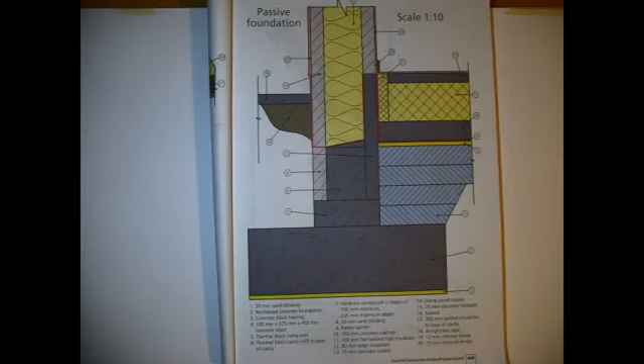In this video we're going to take a look at the passive foundation and how we set this up, and we're also going to look at what's in the workbook and some of the points that are not really making this workbook a passive foundation. So we've got a cold bridge running from inside to outside here, so obviously it's not going to be a passive foundation with that there.

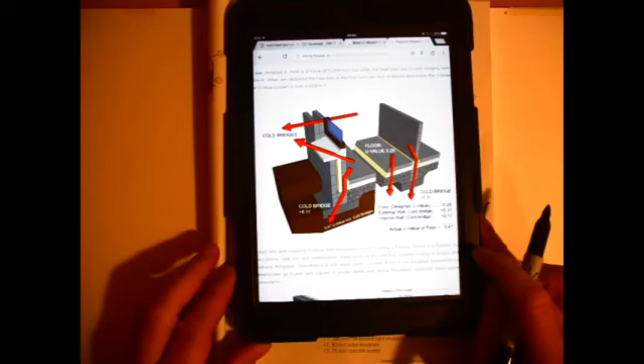So taking a look at a few details here online, we can see from the pictures here on the iPad, the first one showing cold bridges, but there's the EPS that's used here as the formwork, the expanded polystyrene. The concrete is poured into this, and it creates a kind of cloak around the concrete, preventing the cold bridges.

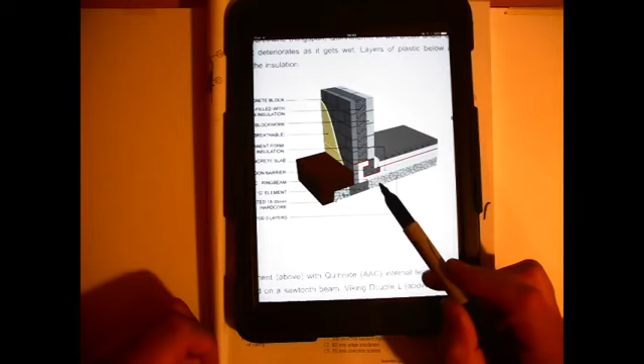So you can see some of that there, and some details are shown here of EPS being used. The one that we're focusing on is going to be a concrete block wall, which we see here, and you can see the cloak of the EPS at the very bottom. There's some hardcore fill, EPS layers, permanent form around there, which we looked at just before that.

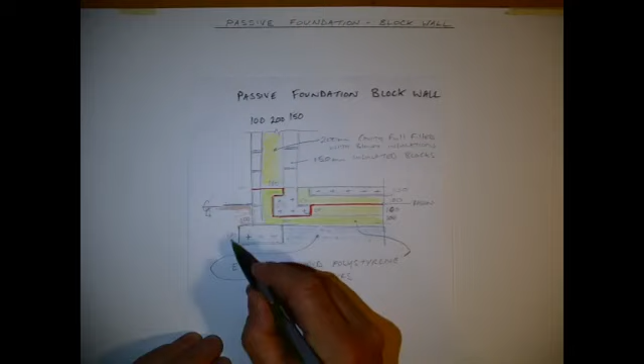I've done a quick sketch here to show this, and colours are going to be quite useful in this drawing. We can see the foundation, which is slightly off centre for the support of the external wall. That can be formed from the inside with the EPS, and the outside would be hardcore. You'll be looking at a depth somewhere between 100 and 300, so I'm going to pick 200.

What I'm showing here is the line of the 200 cavity fill is in line with the inside edge of that foundation, and we have a 150mm insulated block used here. Quinlite is the brand that we'll be looking at. Basically it's just a block with insulation in it, and the size is increased to increase its strength as well. I'd like to keep the ground line somewhere in line with the radon as well, and this is the EPS that we see at the bottom.

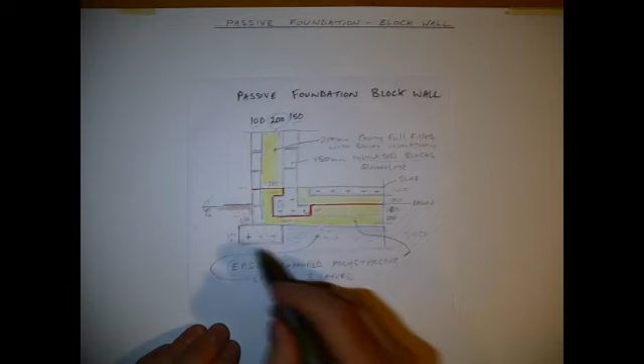So roughly there's 300 underneath this here. Obviously the subsoil will have an impact on the design of the foundation as well, and the way it's done. There may be a need for compacted filling underneath, depending on the soil type. So anyway, to get started, we have to start here at the bottom.

I'm going to start with drawing the foundation part for the external wall, and the sizes I'm using are 400 by 200, and the scale is 1:10. Different to some of our other drawings, I'm going to use a block size of 225, and you can allow a double line for where the mortar joint will be. That's what I've used there, so 225 up to where the ground line is.

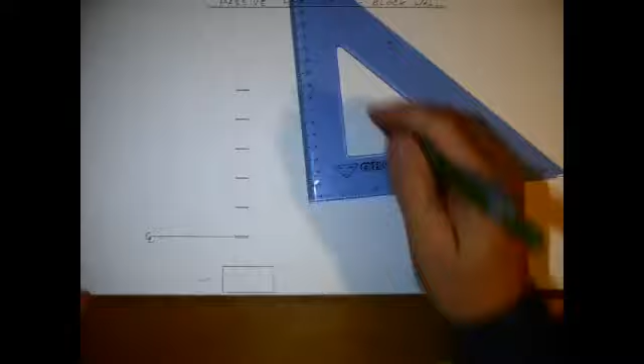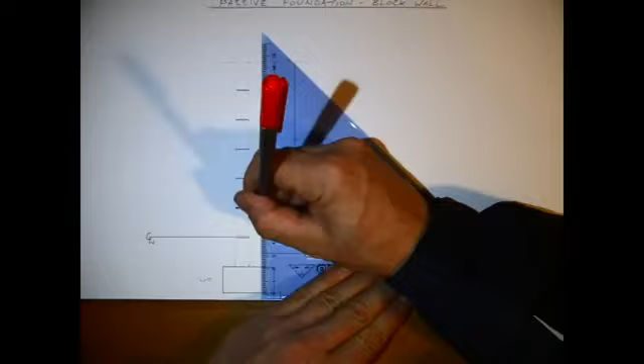Then I need to come over my 200 for my cavity fill and the lining up of the EPS. So I've created this block on the inside, and basically it's taken 100 from the inside of the external block, and they're lining up, matching sizes. So that's all that's done with that. You can look back to the initial sketch for alignment details, and I've got a slab drawn here at 100 as well.

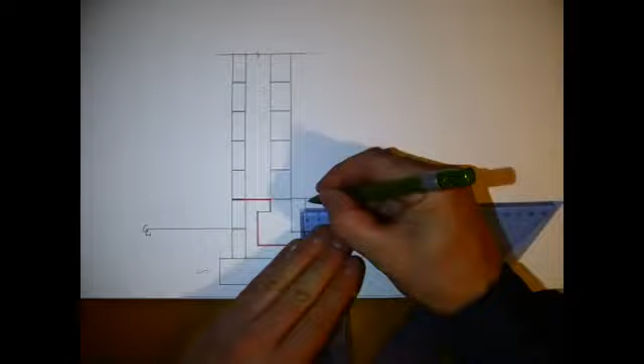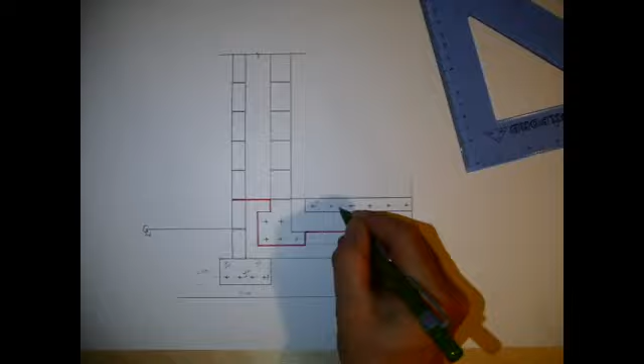The lines are important too for the former, which is used to create the ring beam, and these are reinforcing bars that have been placed in. Spacing I don't think is terribly important, so long as you don't go too close to the edge. Keep it back 50 and something that looks quite even, because we wouldn't be familiar with the exact building regulations and sizes of reinforcing bar, but by showing it's there, you're showing you understand that it is a requirement.

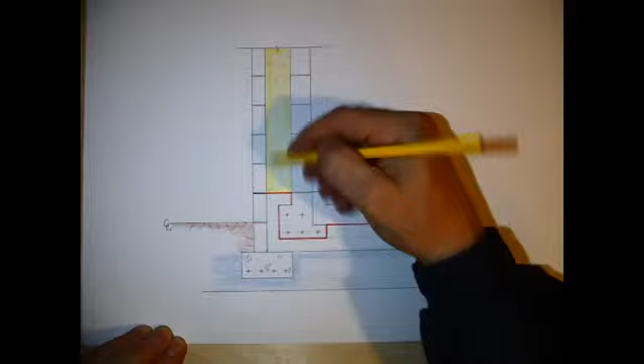Other details then, slightly different for the cavity fill. This time I'm not using the standard detail, because it's a blown insulation, and the blue is showing the EPS at the very bottom. At one point it's going to come up against a graded fill, so that has to be shown as well, and I use a slightly green colour to show the former of the insulation, which we looked at earlier. And I've got my concrete detail to use for the ring beam, the slab, and the foundation itself.

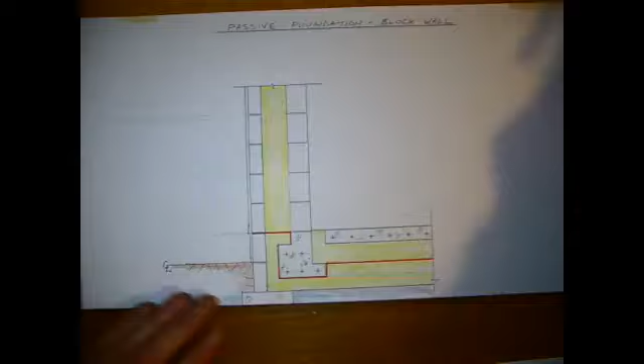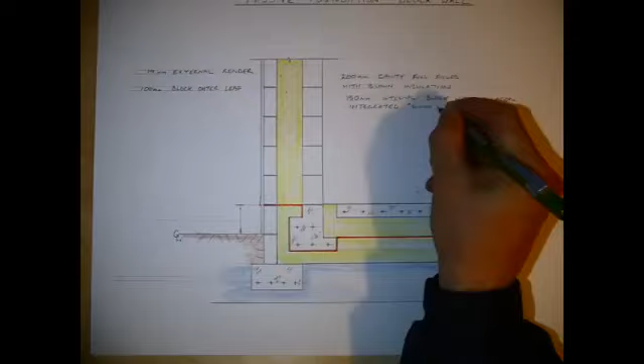Usual stuff that you can put in is your external render, the height of the radon barrier DPC. Make sure you label all the little bits, different details and sizes. That external render could actually be changed to a breathable render. The cavity 200 fill, the block 150, which has integrated insulation, and other details as we go around here.

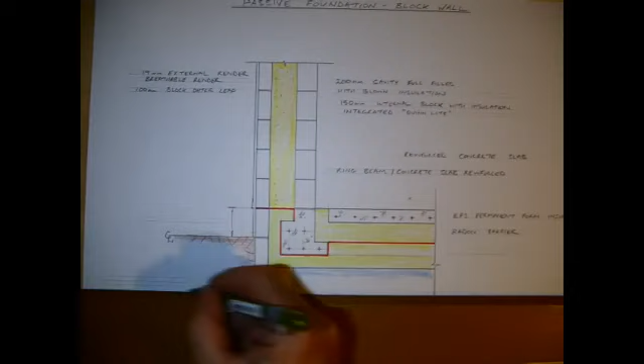You have a reinforced concrete slab, and the permanent form EPS, which creates the ring beam, sometimes referred to as the concrete slab, which is reinforced as well, but ring beam would be the preferred name. We have the EPS and the radon layers in blue below that and to the side, and I've just written where the reinforced concrete foundation is; one side of that could be the compacted hardcore, and that's what I'm showing in the detail.

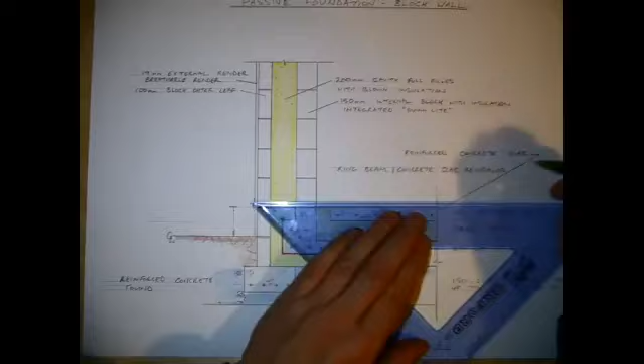And just include your scale. I think I've left the scale out here, so scale 1:10 again. And we can see that there's no thermal bridge.